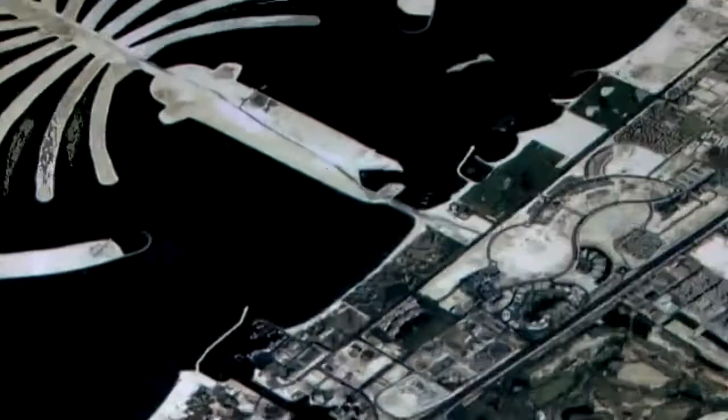Stretching 5.5 kilometers into the Arabian Gulf lies the most audacious engineering project the world has ever seen. Palm Jumeirah is so vast it can be seen from space. Built only from sand and rock, threatened by earthquakes, violent storms and erosion from the sea, it's remarkable that Palm Jumeirah exists at all. If God had wanted an island in the shape of a palm tree in the ocean, he'd have put one here. Engineers must race against time and battle constantly with the forces of nature. This is a megastructure they thought could never be built.

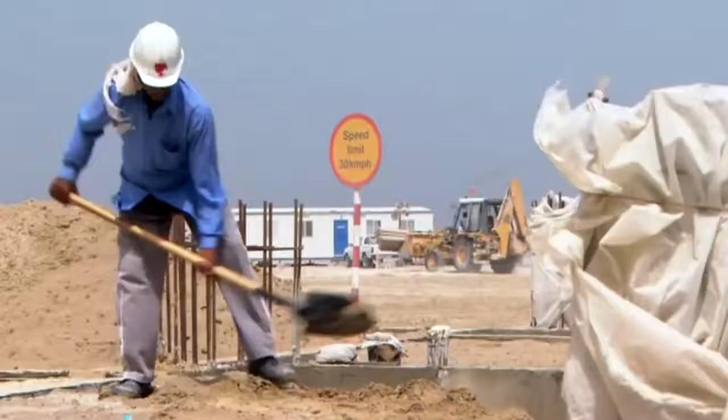August 2001. The Arabian Gulf is a massive hive of activity. Dubai is building one of the biggest man-made islands in the world. Engineers have a daunting task ahead of them, because this is a construction like no other.

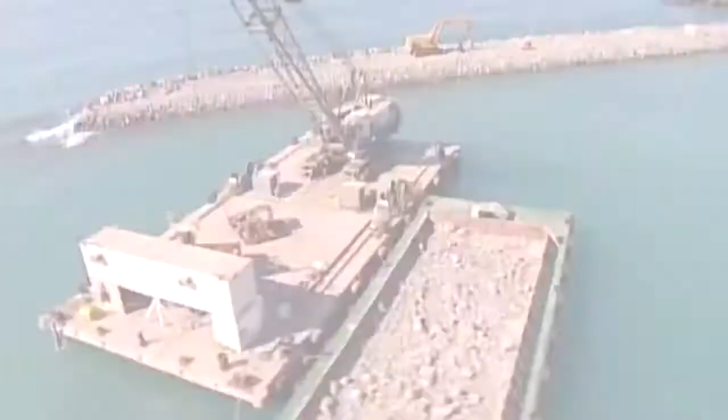All structures stand in defiance of nature. Most are built from concrete and steel, materials that are artificially strengthened. But this massive island is being constructed out at sea, using only natural materials, sand and rock. And both start eroding the moment they hit the water.

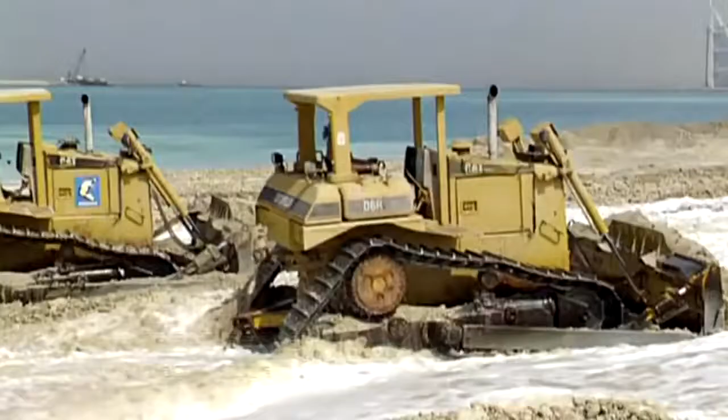For project manager Bob Berger, it's a daunting task. Any construction is in defiance to nature, and this is an extreme example of that. Every day, we're trying to prevent the destruction of what we built.

The Middle East, Dubai, the jewel of the Arab world. A kingdom built on the profits of its oil reserves. This tiny emirate, twice the size of London, is one of the richest places in the Arab world. But it hasn't always been like this.

50 years ago, Dubai was a trading town built on a creek. Over half a century later, it's been transformed. Now it's famous for gold, trade, and oil. But there's a problem on the horizon. By 2016, the oil will have run out. It'll mean disaster for the economy. Dubai must find a new source of income.

The Crown Prince, Sheikh Mohammed bin Rashid Al Maktoum, has a $2 billion plan to save his country. He's ordered his kingdom to transform itself into the world's number one luxury tourist destination. And the Crown Prince has a history of getting what he wants. To put Dubai on the map, he's already built one of the most luxurious hotels in the world, the Burj Al Arab, created top-class golf and race courses, and is planning the world's tallest building.

But now, the Crown Prince's big idea is mass tourism. Dubai seems the perfect spot. It offers sun almost every day of the year, glorious beaches and azure seas. 5 million tourists visit here annually. Now they want to triple this to 15 million.

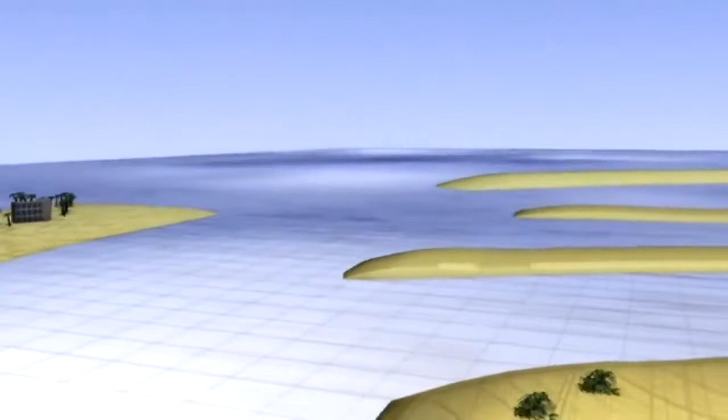The easiest way to build such a massive structure at sea is to use concrete and steel. But this doesn't fit with the Crown Prince's plans. His idea creates an added challenge: to blend in with its surroundings, the island must be made entirely from natural materials. The palm-shaped island will only be made from sand, 94 million cubic meters of it. All that protects this from the sea will be a breakwater, 5.5 million cubic meters of rock. Together, there's enough sand and rock to build a 2.5-meter high wall circling the entire world.

This may be the only place in the world where something like this could be done, to have the vision and then the courage to carry it through.

To make this audacious plan a reality, Dubai needs the best engineers on the planet. A worldwide search leads to Northern Europe and Holland. Experts in land reclamation, the Dutch have increased Holland's landmass by 35%. The Dutch team are immediately booked for the job.

The first thing they must prove is that it's possible to build an island out in the Arabian Gulf and that it'll stay there. They know the only way to keep the island in position is to surround it by a breakwater. But just how big does this sea defense need to be? To find out, researchers must calculate the strength of Dubai's storms, the height of the waves and tidal surges, and what effect global warming will have in raising the sea level.

The biggest fear for all coastal engineers are massive freak waves. These waves build up over long distances, pushed by persistent winds and large currents. They destroy nearly everything in their path.

But the island builders are lucky. The research team has worked out that the Arabian Gulf is the perfect place to build this megastructure. On average, the Gulf is only 30 meters deep, and it's only 160 kilometers wide. It's too short and too shallow for catastrophic waves to build up.

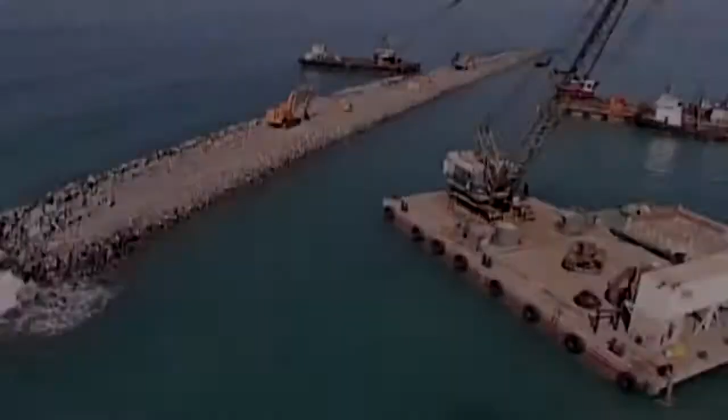September the 11th, 2001. The World Trade Center in New York is attacked in a brutal act of terrorism. Overnight, tourism to the Middle East stops. But work has already started on the Palm Island. Will millions of dollars and months of research all be in vain?

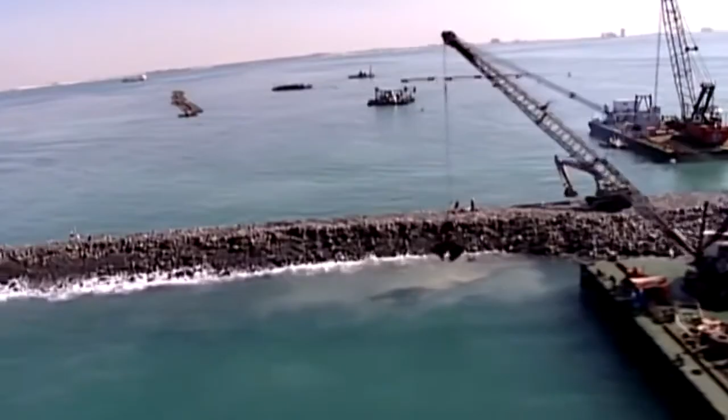September 2001. In the wake of terrorist attacks in the United States, travel abroad halts abruptly. Fear and panic spread. People are too frightened to travel, particularly to the Middle East. It could have disastrous consequences for Dubai's ambitious plans.

Work has already begun on building one of the biggest man-made structures in the world, a giant palm-shaped island that'll transform Dubai into a world-class holiday destination. The massive 11.5-kilometer breakwater is under construction. Both the breakwater team and the Palm Island team are assembled to make the dream a reality.

But 9/11 throws the plans into turmoil. The 1,200 foreign engineers fear their lives could be in danger. They make contingency plans to leave the country. In the meantime, they're advised not to go into Western hotels and bars.

Business slumps. Beaches are empty. Restaurants deserted. No one wants to be here. For 3 months, Dubai grinds to a halt. The sun is setting on the Middle East's tourist industry.

But the job must carry on, whatever the political climate. The oil reserves are running out. The Crown Prince stands firm. The developers are now committed to the build.

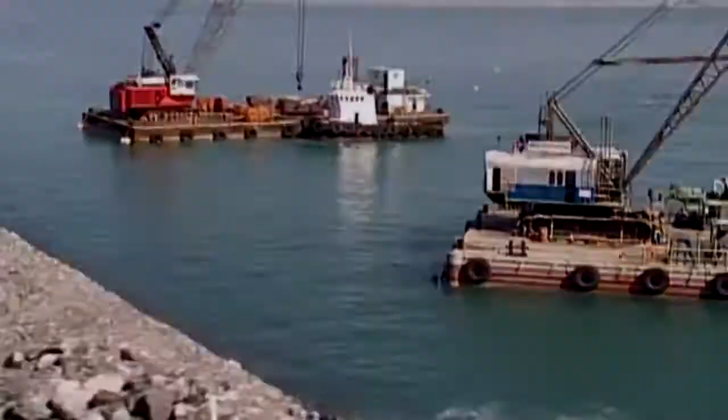Millions of dollars have been spent hiring the world's top reclamation engineers. They've worked on huge projects, like Hong Kong's Chek Lap Kok Airport, Holland's North Sea Wall, and Singapore's Industrial Centre. But no one has reclaimed a structure this size or shape before.

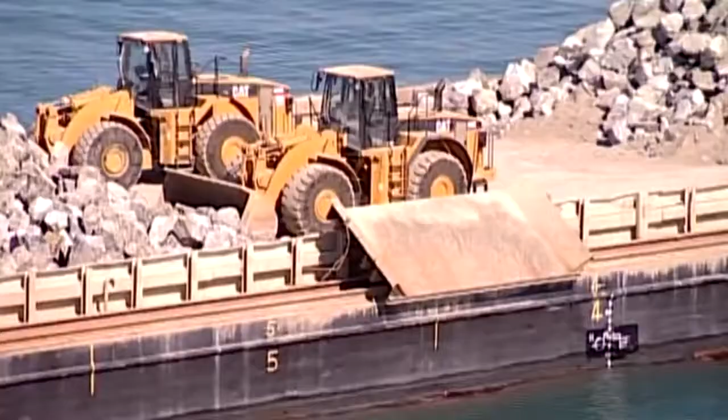By November 2001, the race to build this megastructure is really underway. 9 barges, 15 tugboats, 4 dredgers, 30 heavy land-based machines, and 10 floating cranes are needed to construct the massive seawall. For the breakwater team, their first step in this awesome challenge is to build up the sea floor.

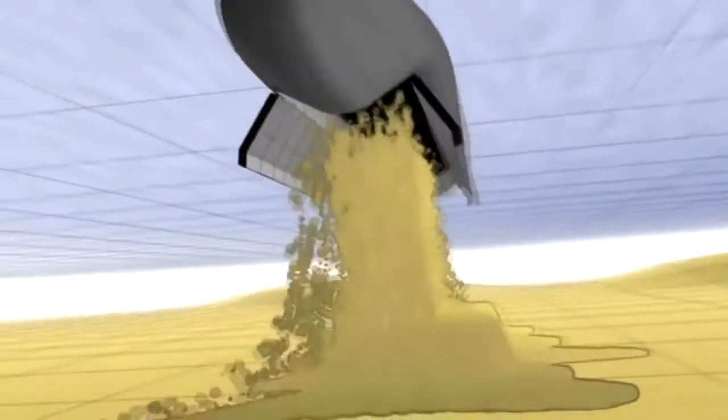3 massive dredgers take up a thin layer of sand from the barren seabed nearby. Then they dump this sand in a layer up to 7.4 meters thick. This must be done while the sea is at its calmest.

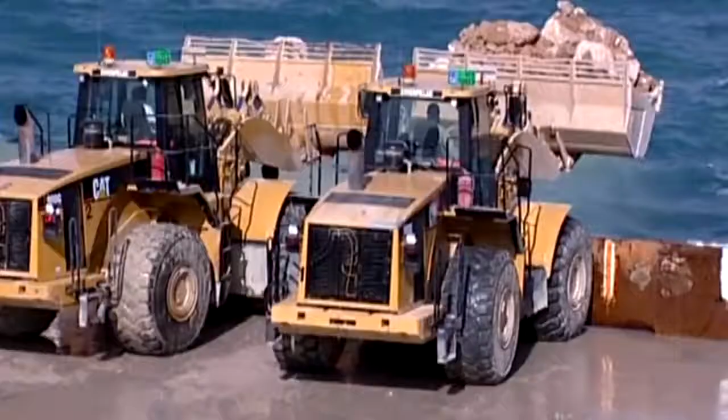To keep it in place, barge loads of rubble are dropped on top of this. This bed of rock will raise the breakwater from 4 meters below sea level to 3 meters above. It's the beginning of the sea defense, without which the island cannot exist.

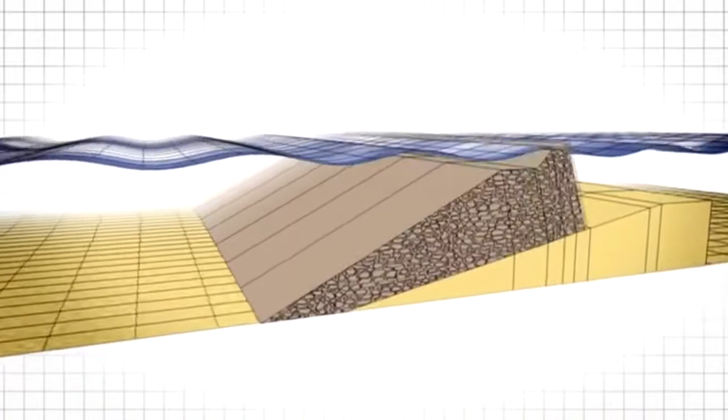The sloping layers take out the force of the waves as they hit the wall, but the sand and rubble layer is only the base, the core of the breakwater. What really creates the protection is the outer armor. For this, engineers need vast lumps of rock.

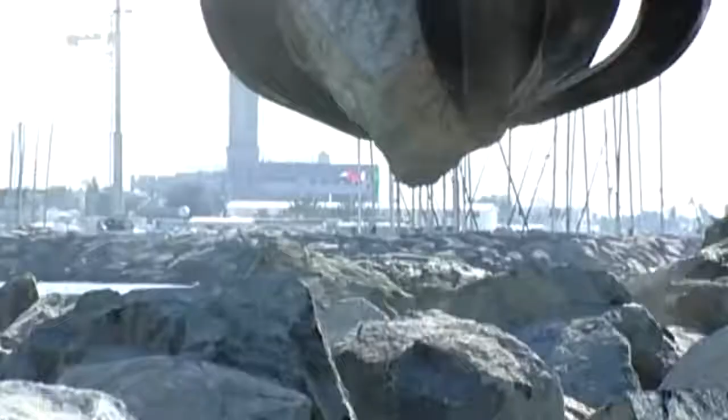Each piece of rock weighs up to 6 tons. It's these massive boulders that will protect the fragile island from the destructive force of the sea. But sourcing enough rock is an enormous task.

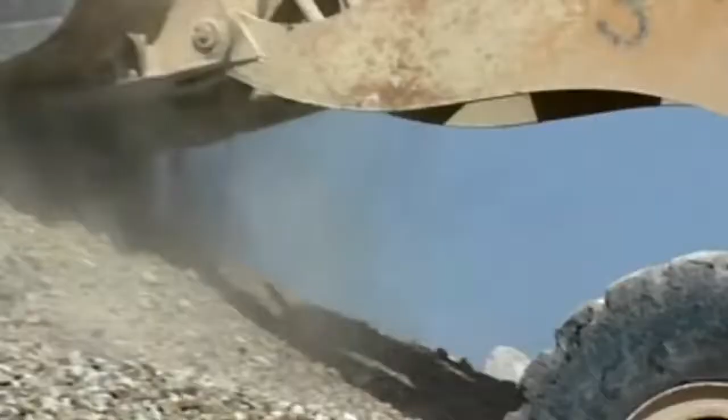Excavation teams spring into action in 16 quarries across the United Arab Emirates. The 11.5-kilometer breakwater needs a lot of rock, 5.5 million cubic meters of the stuff, enough to build 2 Egyptian pyramids.

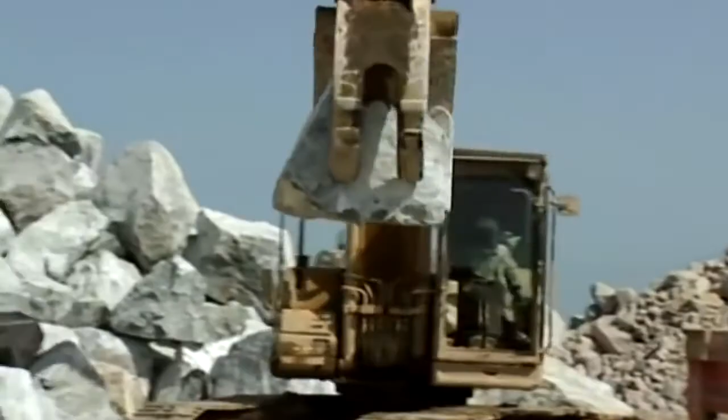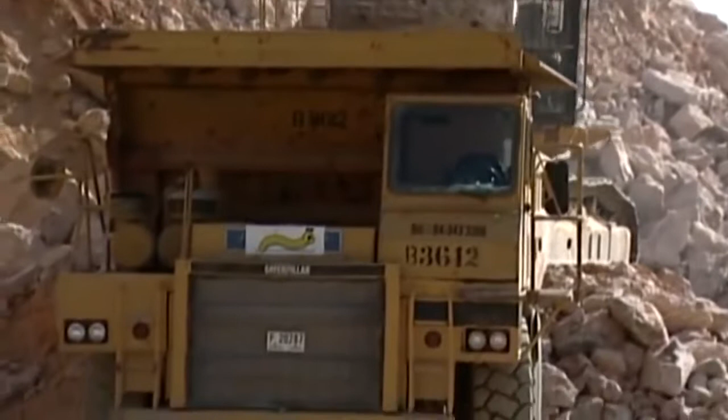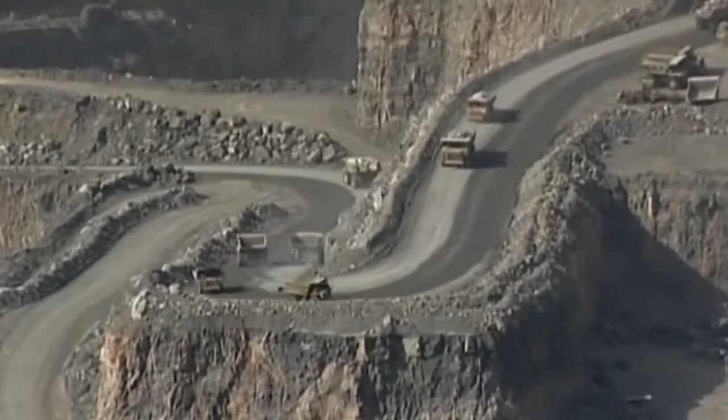Rock is blasted out of the mountains night and day. Loaded onto dozens of lorries, it begins the arduous journey to the coast. Here, the rocks are immediately piled onto barges and shipped straight to the construction site. It takes less than 24 hours for each rock to travel from quarry to breakwater.

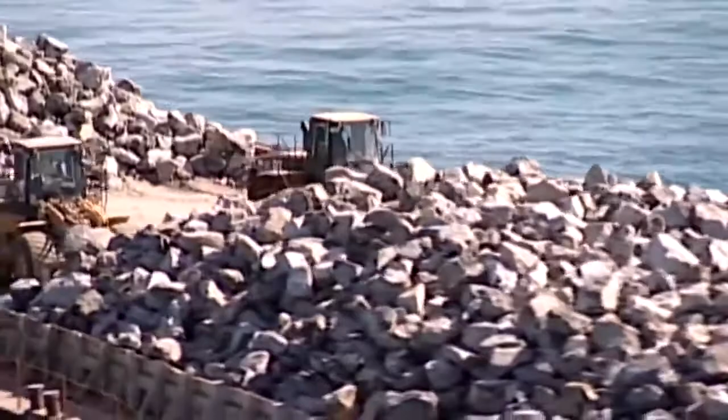24/7, this floating conveyor belt delivers up to 40,000 tons of rock per day, nearly the same weight as 2 aircraft carriers. The density, size, strength, and permeability of each boulder is crucial. This stone wall must last for centuries. There's no concrete or steel holding these rocks in place.

These vast boulders are not just dumped in position, graded by size and weight, it's the sheer volume that keeps them here. Positioned by cranes, each rock must interlock with the next to withstand the full force of the sea. Constant checks are needed to ensure the breakwater is in the right place and the rocks are stable.

The only sure way to do this is to send in divers to pinpoint and check every meter of it. Nothing about this megastructure is left to chance. Any movement could cause the rock to crack and the wall to disintegrate, leaving the whole project vulnerable.

A detailed study of the breakwater rocks below the water is needed. Divers are looking for signs of fatigue on these 6-ton boulders. Their fear is that some will have splintered or been knocked out of place by strong waves when they were put here.

Every 27 meters, a diver surfaces to record the location of the rocks they're checking. The reading is taken from a man based on land, but so far this section of the breakwater stands firm.

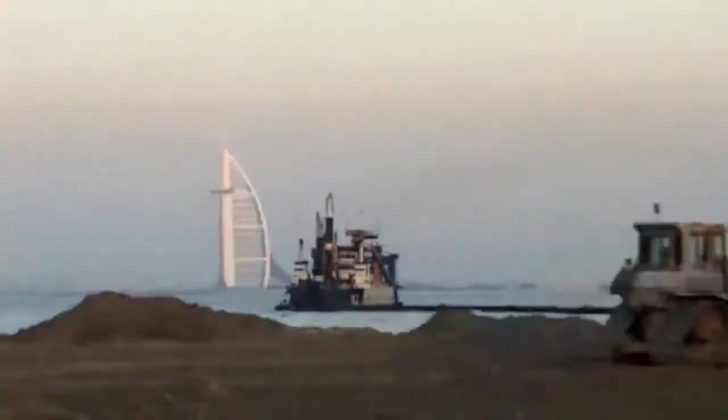It's a momentous achievement for the team, but there's still over 10 kilometers of this vast sea wall to build. The engineers are jubilant, but their happiness is short-lived.

Winter is closing in. With a schedule of only 2 years to complete the breakwater, the last thing anyone needs is a delay. Winter in the Middle East brings shamals, great storms with winds of up to 56 kilometers per hour. Wind shifts are sudden, whipping up the sea, bringing torrential rain, violent thunderstorms,

or blinding dust storms. On land, little can move. Out at sea, things are even worse. Massive waves batter the boats that need dead calm water to place the sand and rock with pinpoint accuracy.

We had to seek shelter in the very little shelter that we had built. Engineers planned for the bad weather, but the storms of March 2002 are worse than they feared. Everybody crowding around trying to protect themselves from the storms.

The boats find shelter, but more worryingly, will the breakwater hold? It's a nail-biting time. Over the next 3 weeks, the storms are relentless. All the engineers can do is watch and wait.

The breakwater stands firm, but the schedule is slipping. The construction team is 3 weeks behind, and the pressure is immense. Every second counts. It's vital that the fragile sand island has protection.

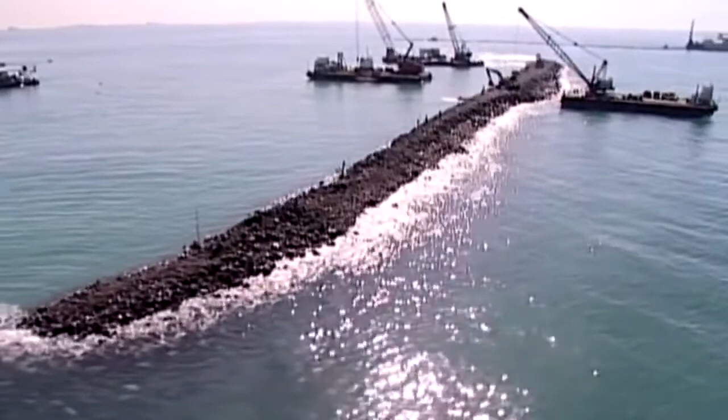Only when a 550-meter-long section of breakwater is built can the Palm Island begin to rise above the sea. But the schedule is desperately tight. The entire megastructure must be complete by 2006. They have 2.5 years to create the island and breakwater, and just 2 years to build the city on it.

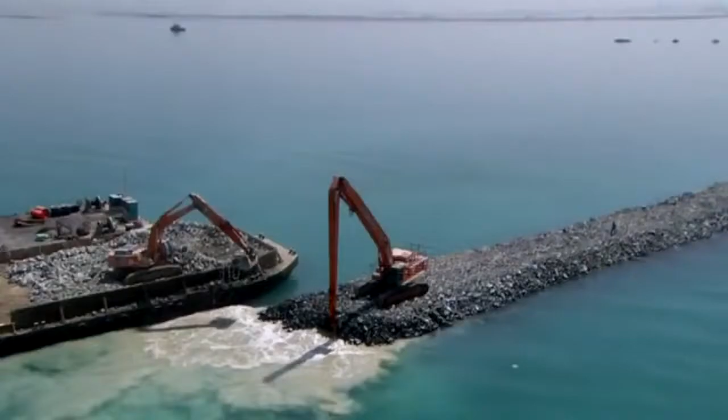The only way to meet the deadline is for both the breakwater and the island to be built at the same time. It's not an ideal situation. It will mean that throughout the build, the Palm Island will have the bare minimum of protection from the sea. But the engineers have no choice.

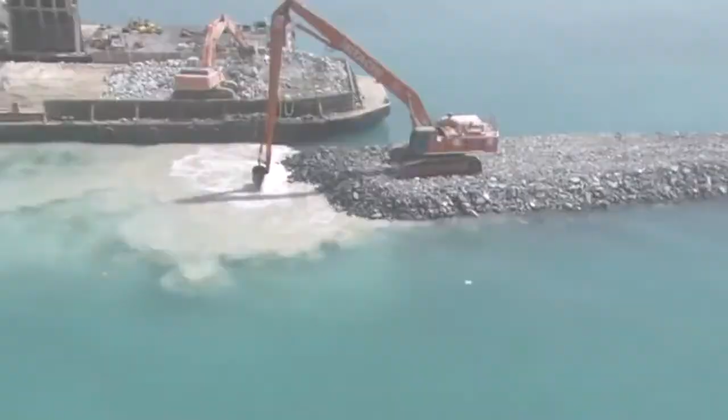The deadline is set. While the second team building the island wait for the protective breakwater to be built, they keep ahead of schedule by laying the sand foundations below sea level. But now, 8 months after construction began, they are desperate to break the surface.

Finally, April 2002, the first 550-meter section of the breakwater rises 3 meters above the sea. At last, the builders of the Palm can step up the action and bring the island above sea level for the first time. To complete this massive island, Team 2 has the awesome task of finding 94 million cubic meters of sand to create their island.

That's enough sand to cover the whole of Manhattan 1 meter deep. It's an enormous job in itself, but finding the right sand is an added headache. Dubai has more sand than it could ever need, but there's a problem. Desert sand is the wrong material for the job. It's too fine. The particles won't cling together. It means that the vast sand island would simply wash away. The engineers must look elsewhere.

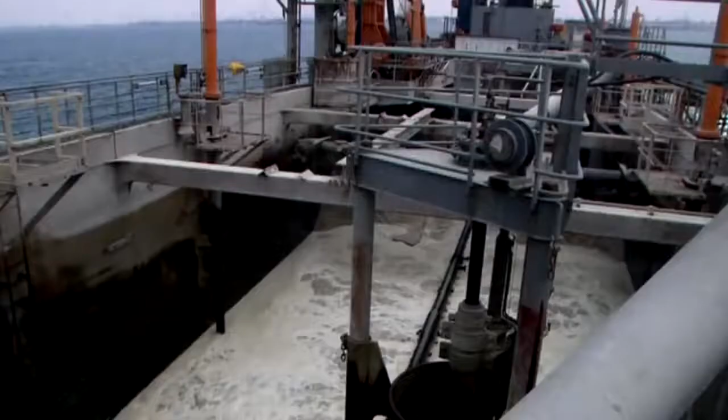The best sand for the job is found 6 nautical miles out at sea. This sand is much more suitable. It's coarse, packs densely, and is more resistant to wave impact. They will dredge sand from the Gulf seabed. And there is an added benefit: the dredgers will spend less time transporting the material to the construction site.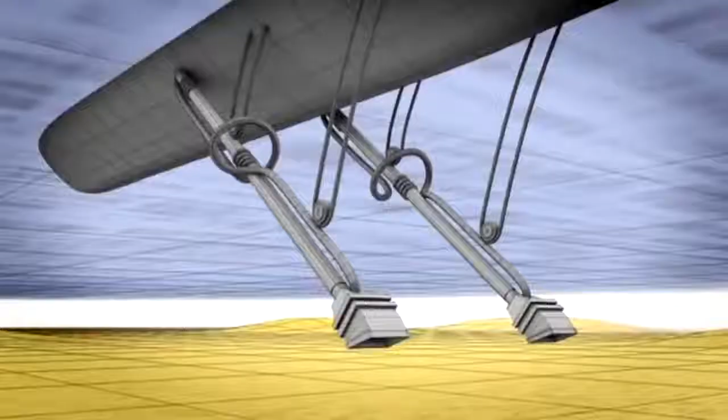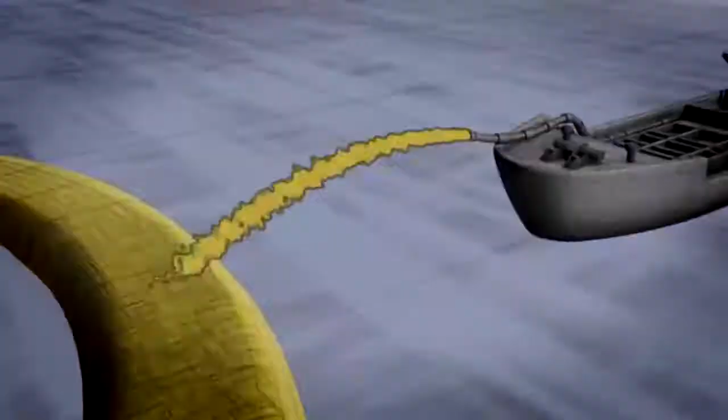In just 3 hours, a dredger travels to and from the site, scoops up the sand, and sprays it into position. It works a 5 square kilometer area, dredging up the top meter of the sea floor. It takes less than an hour to fill the 8,000-ton tank with sand. The sand is then pumped through a pipe and sprayed into place at 10 meters per second, enough to fill an Olympic swimming pool in 4 minutes. The process is called rainbowing.

The island construction team work round the clock to keep to the tight schedule. Night and day, the island grows bit by bit. The rainbowed sand builds into a sandbar, rising up to 4 meters out of the water. But for the engineers, there are mixed feelings. Is the shape of the island progressing as planned?

There's great excitement, and there was great anticipation, and a little bit of fear. Is it in the right place? With doubt cast over the construction, Dubai has a trick up its sleeve.

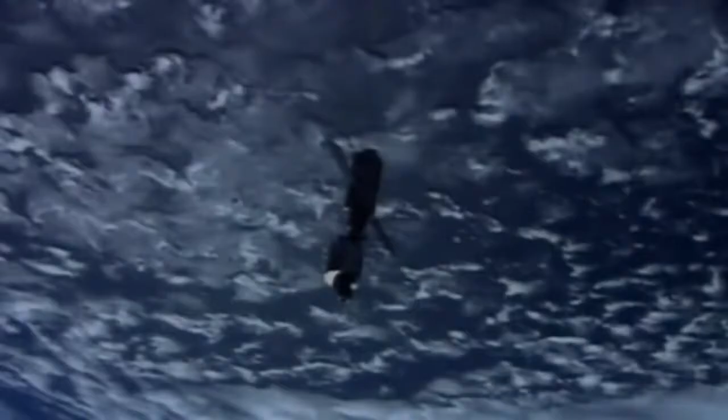676 kilometers up in space, Dubai has access to the only privately owned satellite in the world. It's so powerful, it rivals those of the Russian and US military. The satellite, IKONOS, orbits the Earth, taking pictures that prove the island is totally on track, so far. It also means the Crown Prince can keep a close eye on his pet project.

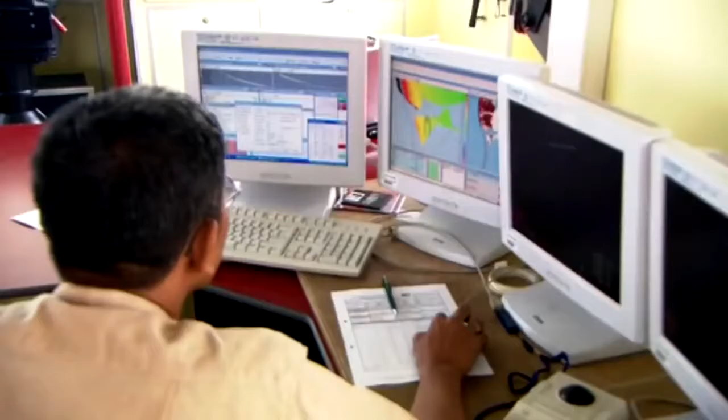August 2002, a year in, and the island team is ahead of schedule. 8 kilometers of the breakwater stands firm. 8 palm fronds break through the azure seas. But it's a grueling and difficult process.

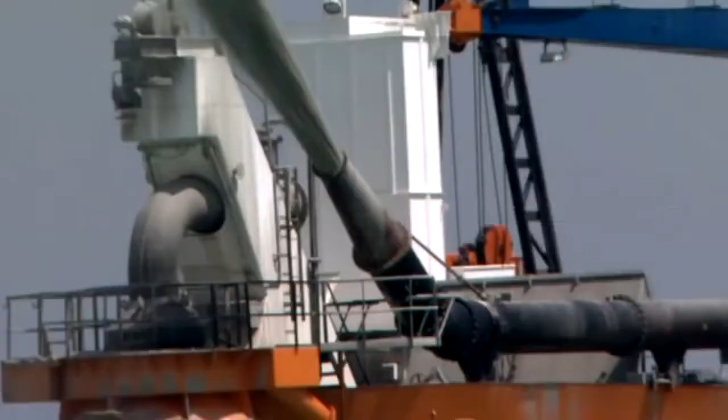Rainbowing is a common operation in land reclamation, but this is no ordinary reclamation project. There is no mold for the palm shape and no fixed points to get bearings from. The unique shape makes it a nightmare to build because the whole design relies on accuracy. This enormous structure has 56 kilometers of waterfront and almost all of it is curved. To make things more difficult, it's impossible to tell from the ground if the sand is falling in the right place.

The only way to complete this task is to use state-of-the-art technology. Prior to GPS, we couldn't have done this job. There are only 2 straight lines in this project; all the rest of them are curved. It's all down to a team of 5 men who walk the perimeter of the island every day as it takes shape. It's grueling work.

Summer temperatures reach a searing 48 degrees Celsius. Humidity hits 95%. With heavy packs strapped to their backs, these mobile receivers create a grid reference for the island. Receiving signals from space and a fixed position on land, the height and position of the sandbars is recorded. With these coordinates, dredgers can sail into the exact position and rainbow the sand with pinpoint accuracy.

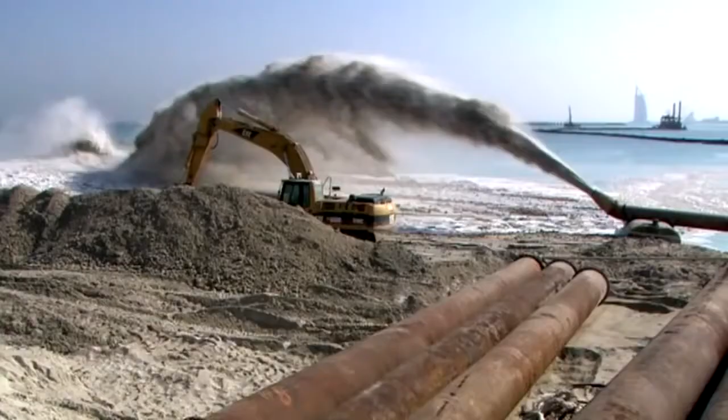Post 9/11, Dubai emerges as a safe haven in the Middle East. The beaches fill up again. Business resumes. The Crown Prince's gamble to continue construction has paid off. But there is still a deadline to meet: the island must be built by 2006.

Coordination between the two teams, one building the breakwater and the other reclaiming the sand island, is crucial. If they don't work in perfect synchronicity, the whole project could be thrown into jeopardy. If the breakwater progressed too quickly, it would cut off access for the reclamation contractor. If the reclamation went too quickly, it would be at risk from the storms. We couldn't let one get ahead of the other in any way. It's a delicate balance. But a year into the project, incredibly, work is on schedule.

Against all odds, the Palm Island rises above the waves, protected by the ever-increasing sea wall. It's a symbol of engineering achievement. But the engineers' biggest challenge is still to come: how to make the island safe to build on.

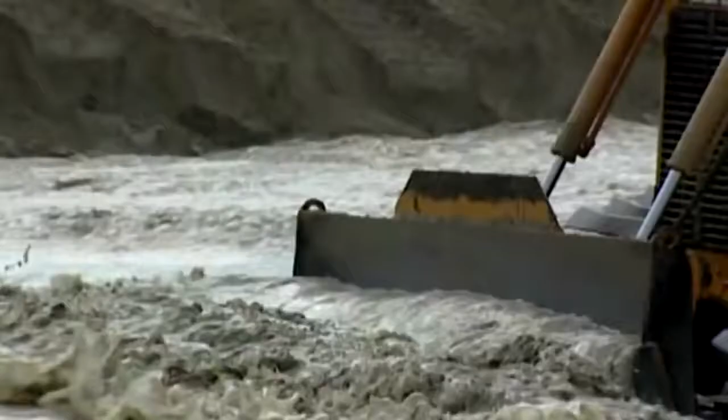The majestic Palm Island is only made from sand. But sand is unstable and highly susceptible to the movement of water around it. It also takes time to settle before it's strong enough to build on. This awesome structure will support a city of 120,000 people, and their safety relies on firm foundations. This massive sand island must be made rock solid. But how?

October 2002. Dubai is building the world's most audacious engineering project in the Arabian Gulf: a 5.5-kilometer island in the shape of a palm tree, made entirely out of natural materials.

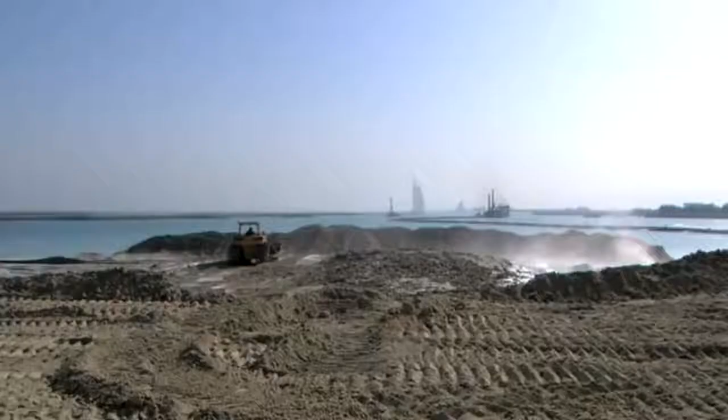A year into the build, and two-thirds of the breakwater is complete. Eight kilometers of massive rocks piled three meters above the waves, backed by 200 meters of beach that will eventually carry 22 hotels. Behind this sea defense, the first 9 palm fronds made of sand rise above the water. Dredgers spray sand from the seafloor, a process called rainbowing, to create the first half of the 5.5-kilometer island.

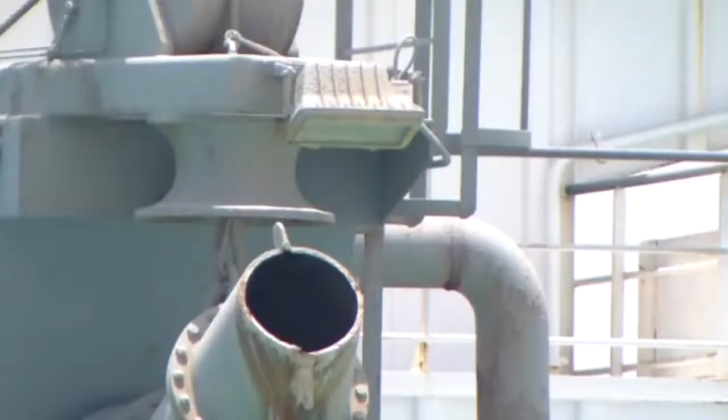But building a man-made structure in the middle of the sea with only rock and sand throws up challenges every step of the way. The team constantly battles with nature as the sea erodes the work they do. We worried initially whether we could actually do it, that we could place the sand where it should be, that we could place the rocks where they should be.

The teams now race to finish the project. But then the engineers discover a problem that could put the whole project in jeopardy. The decision to start construction before completing the research has finally caught up with them.

Coming in or going out, the sea is not circulating around this massive megastructure as they planned. The tides are not flushing the system properly. Clean water is not moving fast enough round the inner waterway. The water is in serious danger of becoming stagnant.

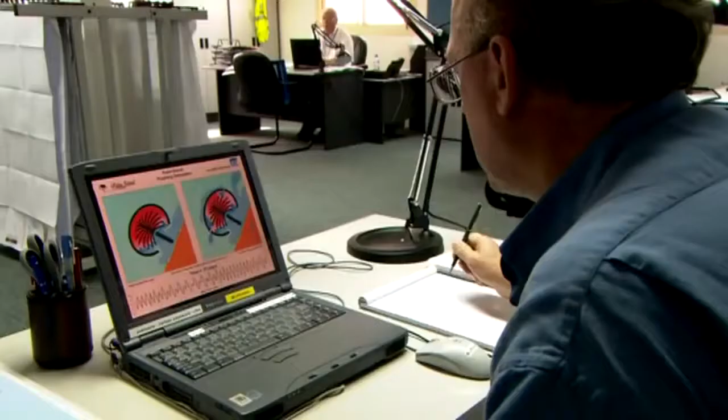People have paid millions for a piece of this paradise island. Green, fetid water is not going to work. A solution must be found, and fast. Changes must be made to the design. But all the time, the Palm Island is taking shape to the original plan.

Further tests are run on the computer. Luckily, the solution is found just in time, and it's simple: the seawall must have two breaks in it. Two 4-lane bridges link the sections of the breakwater. These two openings mean enough fresh-flowing water can get into the system.

Twice a day, the tide enters the structure, pushing clean water around the fronds. Over two weeks, the entire waterway is replenished. But there is always a fear it may return. Environmentalists now test the water every day to check that the system is working. The return of algae and stagnant water is something they can't allow. With the water quality assured, the project is back on track.

Teams race to finish the structure. Seven dredgers rainbow the sand, creating the last few palm fronds. Floating cranes lift the final rocks into place. By August 2003, the breakwater is complete. An awesome 5.5 million cubic meters of rock now holds back the full force of the sea.

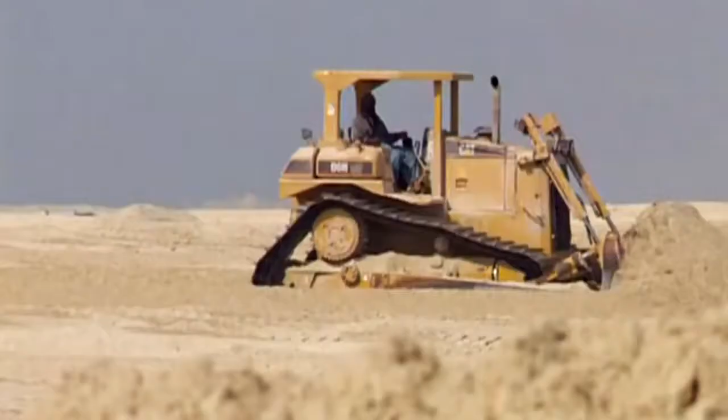Two months later, in October, the island reclamation is finished. 94 million cubic meters of sand have been pumped into the Arabian Gulf to create the perfect palm shape. In just over two years, the Palm Island has finally risen from the sea. The deadline has been met just on time, and phase 1 of this monumental engineering challenge has been accomplished.

But there is still a very long way to go. Phase 1 is only the completion of the foundations. Now to fulfill the Crown Prince's dream: 4,500 houses and apartments, hotels and shopping malls must be built along the waterfront. This sand island must support an entire city. But here lies the next major problem: sand is not easy to build on.

Because the sand has been sprayed into position, it's loose and uncompacted. The material for the islands is dredged from the seabed, which means all the fine materials are already cleansed from the sand. You can drive on it within a couple hours after you reclaim it. However, it's not satisfactory to build on.

But a strong base is vital to support this city at sea. Before construction can start, engineers must find a way to compact the sand to make it firm. In theory, the idea is simple. All we have to do is compress the top layer. When you press down, there's very little displacement except straight down, nothing to the side. That gives us a firm surface to build on.

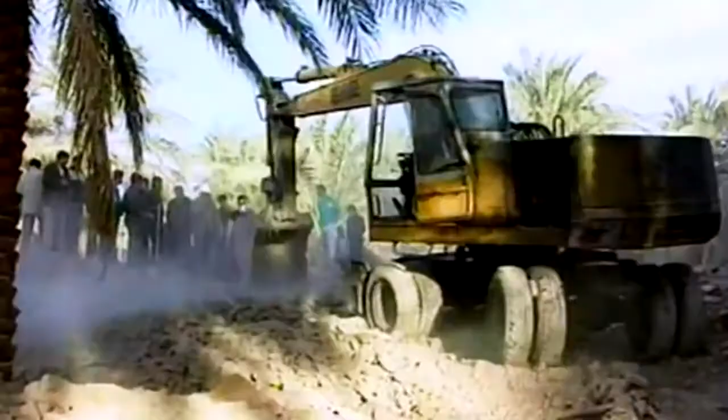Dubai sits just on the edge of a major earthquake zone. Bam, Iran, north of the Arabian Gulf, 5:26 a.m., 26th of December 2003. The town is hit by a quake measuring a massive 6.6 on the Richter scale. In minutes, 60% of the buildings are leveled. 43,000 are dead, 20,000 injured, and 60,000 are homeless.

Following this, multiple quakes hit Dubai, 480 kilometers across the Arabian Gulf. It's a wake-up call to the Palm Island project. If the epicenter hit Dubai, it could spell disaster. Should an earthquake come through the area, the sand might lose its cohesiveness down deep.

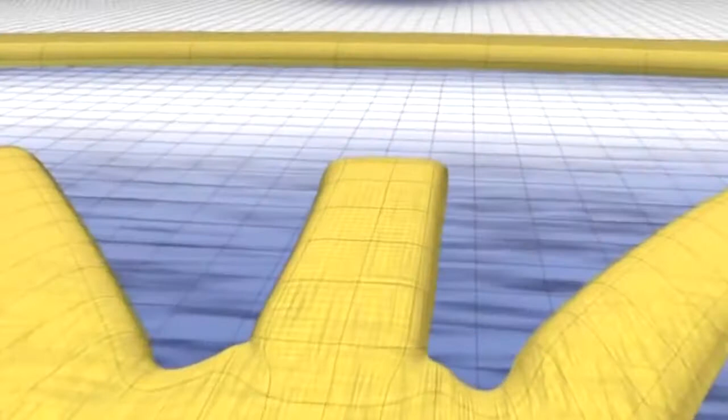The reclamation process piles sand one grain upon another. If we put the ocean around it, you see the island. However, the lateral forces of an earthquake can make the island disappear. This terrifying phenomenon is called liquefaction. It happens when a quake shakes the Earth's surface, causing sand particles to move. As the sand compacts, it pushes the water between the particles upwards, making the ground liquefy. It means the island would sink back into the sea.

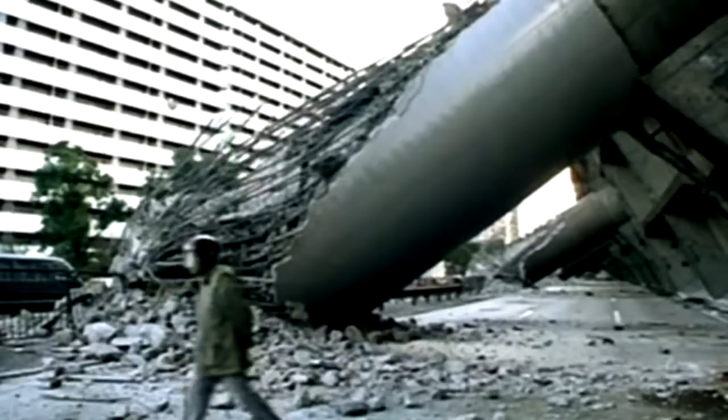This was terrifyingly evident in Kobe, Japan. In 1995, an earthquake measuring 7.2 on the Richter scale rocks the city. In seconds, the buildings are reduced to rubble. But in the harbor, events are very different. The force of the quake liquefies the reclaimed land the port is built on. Harbor buildings and walls literally sink into the sea, causing nearly $7 billion of damage.

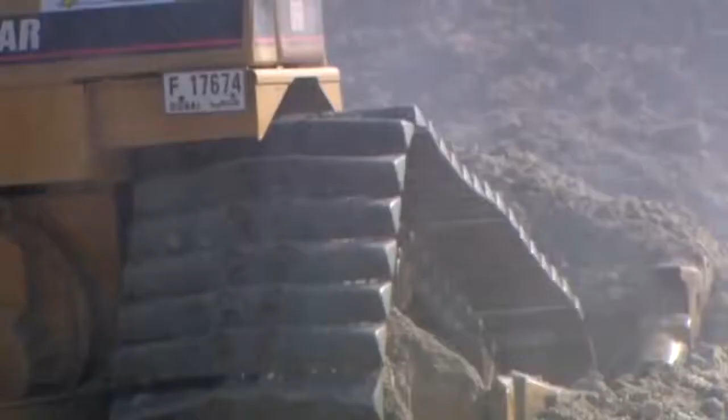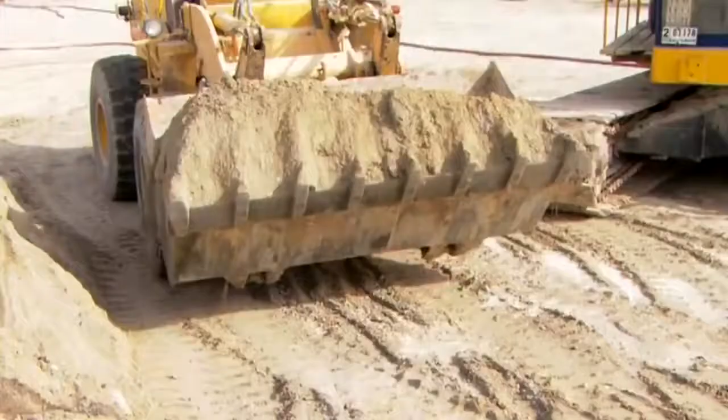It's something they can't risk in Dubai. Before any houses can be built, Palm Jumeirah must be made strong enough to prevent liquefaction. The team works out they need to compact a layer of sand 12 meters deep, too deep to compact by normal road roller. The only solution is a process called vibrocompaction.

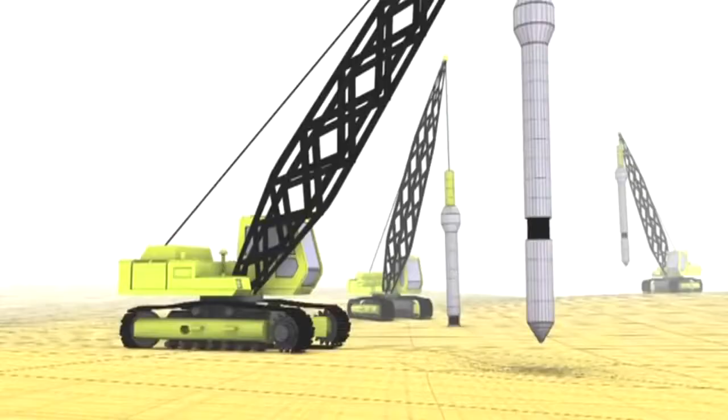January 2004, 15 machines work around the clock to firm up the land. Probes drill over 200,000 holes into the ground across the surface of the island. High-pressure water and air drives each probe deep into the earth. This shaft then vibrates, shaking the ground around it, and the earth is compacted. It's a tried and tested formula. As the sand compacts and sinks, more sand is poured in until the area around the probes is rock solid.

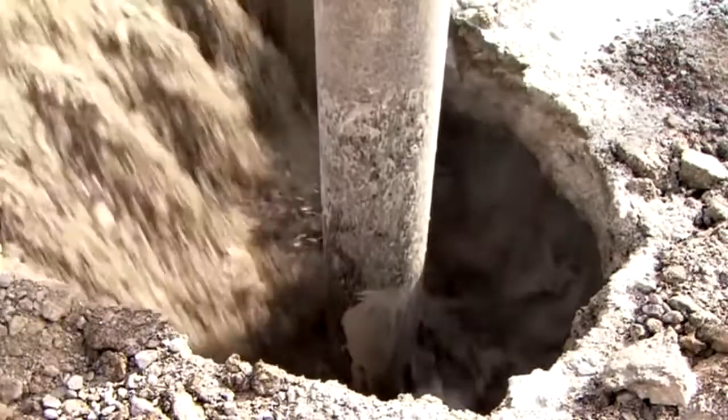It takes the team 8 months to stabilize the 16 palm fronds, but it has to be done to ensure the safety of 120,000 people who will live and work here.

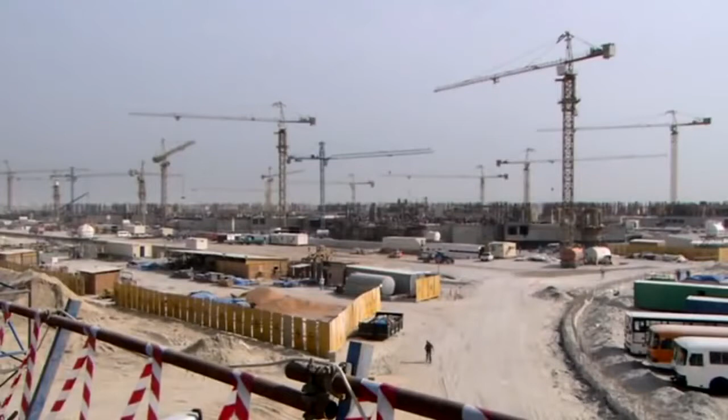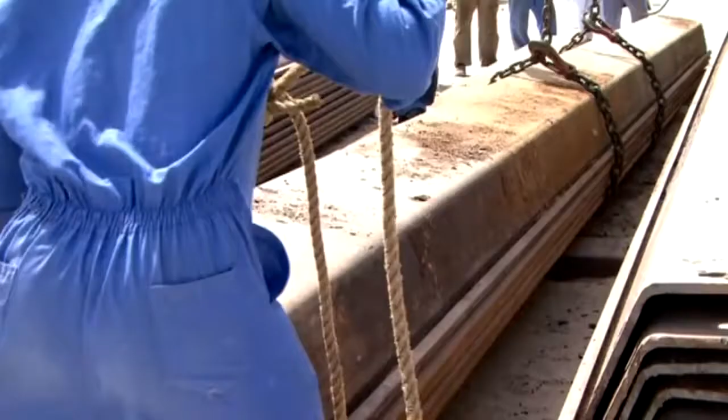March 2004, 2.5 years into the project, and Palm Jumeirah is ready to become a building site. Now thousands of trucks and cranes, tons of supplies, and 2,000 laborers descend on the island. This is the most complicated part of the project: the installation of the infrastructure, gas pipes, electricity cables, water supply, and buildings. In 2 years, they must build an entire city at sea. But have the developers set themselves a near impossible target?

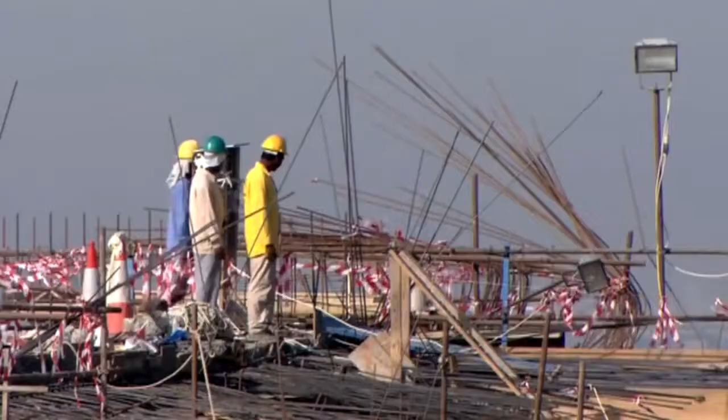January 2005. One of the world's biggest man-made structures has reached a critical stage. After 2 years, the island foundations rise out of the sea. Now engineers turn their attention from sand and rock to concrete, glass and steel. They're building an entire city out at sea in just 2 years. Nothing like this has ever been attempted before.

For project manager Scott Hutchinson, building the apartments is a massive logistical nightmare. I've probably worked on 3 or 4 other billion-dollar projects before, but this is without a doubt the biggest and the most complex that I've ever seen. And I can't imagine other projects being any more complex than this.

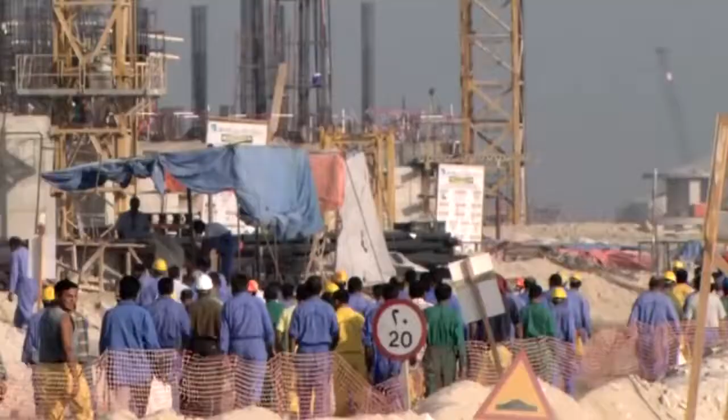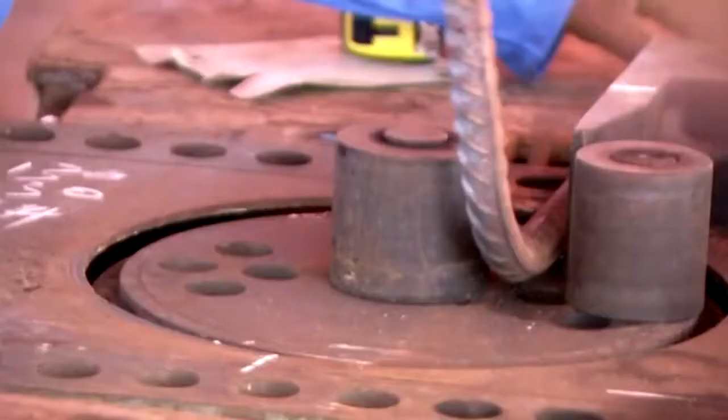850 buses ferry the 40,000-strong Asian workforce on and off the island in two 12-hour shifts. They'll work in grueling temperatures of up to 48 degrees Celsius. As well as thousands of people, millions of tons of concrete and steel are shipped in from around the world and driven onto the Palm.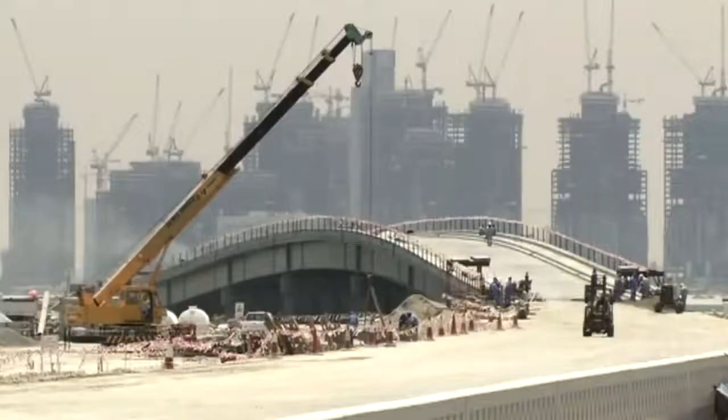51 different contractors build houses, roads, canals, shopping centres, sewage plants, and each part of the jigsaw must meet the next perfectly. To stay on schedule, all the materials must arrive on site exactly on time, and they will go to any lengths if they don't.

If material isn't showing up from overseas, you put somebody on a plane and fly the guy out there to get it done. You don't wait, you don't react, you just get out there and try to be proactive, because otherwise a job this size never gets done.

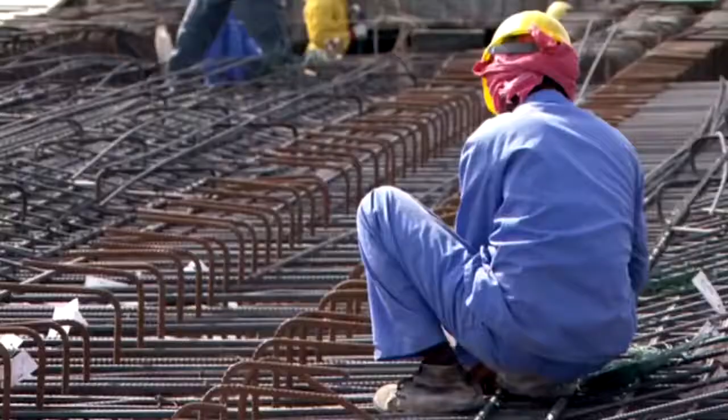Supply is not the only problem. Installation of the utilities and pipelines is a massive headache. Miles and miles of gas and water pipelines need to be laid across many different parts of the construction site.

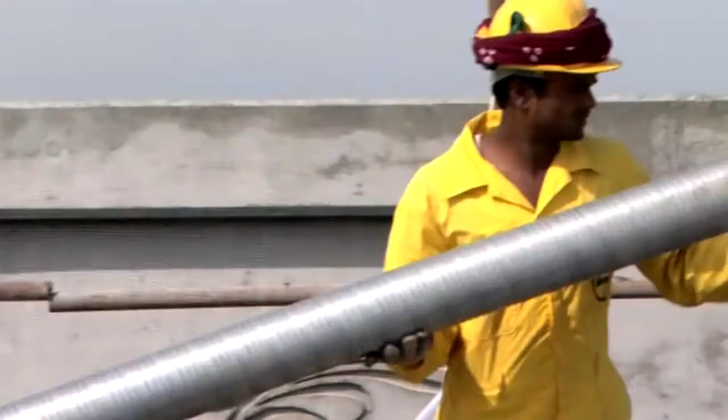Munir Haidar, head of the technical team, knows that on a job this size, a good plan is vital. It's not that there is no plan, there is a plan, but you have to monitor and adjust this plan on a daily basis because it changes every day.

Since the island's launch in 2001, it's changed beyond recognition. Originally, Palm Jumeirah was designed to house and service 60,000 people. But by 2004, developers realized the public loved the idea so much, they doubled the capacity. Everybody's changing their requirements, and you have to learn to react very quickly to that.

And in Dubai, things move quickly. The pressure is on. Incredibly, when the Palm was first released to the public, all the houses sold in 3 days. The most expensive go for $1.2 million. David Beckham and the England football team are amongst the owners.

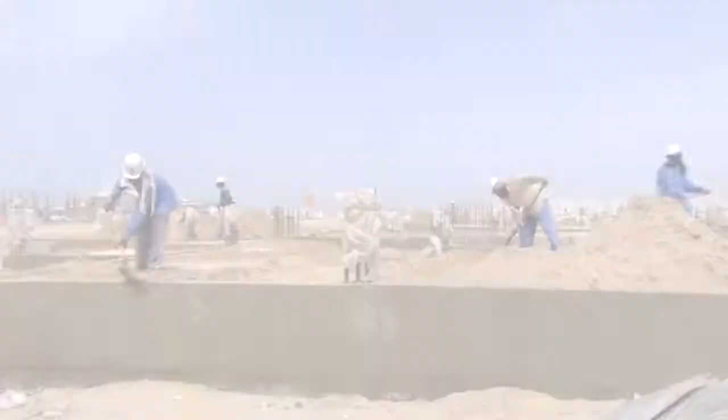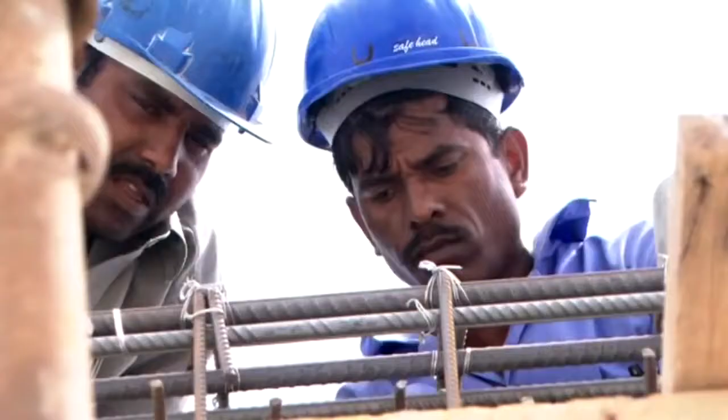Now, 3 years on, the residents want to move in. There are over 1,800 villas to build on the palm fronds, enough to stretch the Champs-Élysées in Paris 14 times. The delivery date looms nearer, and many of the houses are still at ground level.

The schedule is slipping, but the Crown Prince has promised the world a luxury location by 2006. The deadline must be met. To add to the pressure, the design of the palm trunk gets more elaborate every year.

This 1.6-kilometer stretch will carry at least 8,000 villa and apartment complexes, 220 shopping malls and restaurants, and the developers are still threatening more. A new plan is the 36-story Palm Tower, more space for shops, restaurants, and 450 deluxe apartments. But all this extra development comes at a price. The deadline for the trunk has slipped to 2008.

Well, I guess one of the best parts about it is that when you get frustrated with all the challenges and the paperwork and the meetings and everything that goes with building a project like this, you come outside, you see the sunset, you see the sea, and you really realize not only is it an amazing project, but it's an amazing setting. But this awesome setting creates hidden problems for the engineers.

With Phase 1 complete, the island reclaimed, the Palm now faces its biggest enemy, the environment. Nature will permanently try to destroy anything built in its way. The bigger the megastructure, the bigger the problem. From the start of construction, there has been one issue engineers know they will face: the problem of erosion.

All beaches are constantly affected by waves, but with a man-made island, the problem is exaggerated. These beaches are not naturally replenished with sand by the sea. If nature won't do it, someone has to. Otherwise, the whole island will be washed away.

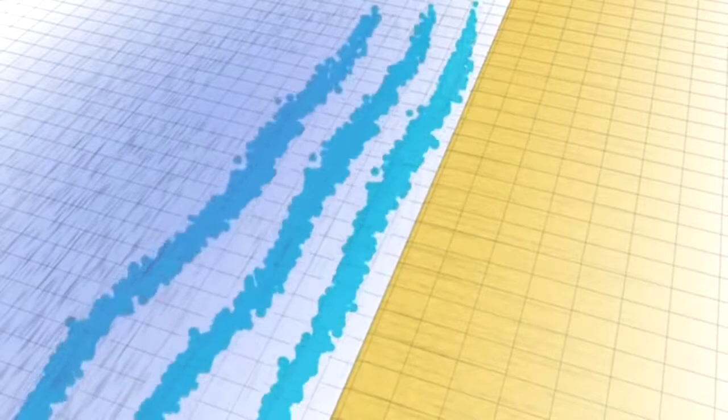Normally, the currents evenly push the sand along the coastline, keeping the beach straight. By building a massive structure so close to the shoreline, wave movement in the area has altered. The current is changing the shape of the coastline. In some places, sand is deposited, extending the beaches out to sea. In others, the beach is eroded away.

And initial research shows some worrying facts. In some places, the shoreline could be eroded by 5 to 10 meters per year. Eventually, it could destroy mainland resorts, property, and roads.

In time, the coastline will settle down. Nature and the structure will learn to live with each other. But this may take years. In the meantime, the developers have bought a dredger.

This will suck up the sand where it is built up along the coast and deposit it in the areas suffering from erosion, returning the coastline to its original shape. Dubai's beaches are safe, for now.

The engineers are constantly working out how to tame nature's forces. The erosion problem is under control. But the threat to the project doesn't just come from the surface of the sea. They now face a new dilemma beneath the waves. How has this awesome megastructure impacted on the ecology of the area?

August 2005, four years after the Palm project started, this audacious island stamps its mark on Dubai's coastline. This was the first step, a big step, in putting Dubai on the map. But by pushing into unknown territory, building structures never built before, engineers face new problems all the time.

Since the Palm Island's conception, environmentalists have been convinced the building of this megastructure would destroy local marine life, ruining one of its greatest selling points, the azure seas it sits in.

For the developers, it's a problem they're constantly watching. Every six weeks, divers check the waters. Fish and corals are monitored and measured. But fears that construction may have destroyed this underwater world appear unfounded so far.

In fact, this megastructure seems to be having the opposite effect. Not only is the marine life unaffected by dredgers removing a meter-thick layer of sand, but the breakwater has created shelter for fish and is attracting new species into the area.

Now the Palm developers are turning this to their advantage. They plan to build the largest artificial reef in the world. In June 2004, two jet fighter planes were dropped to the seafloor for people to dive on. There are even plans to sink a red London double-decker bus.

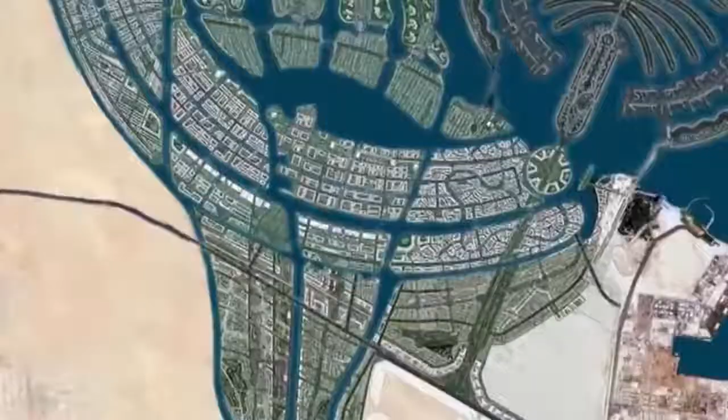In true Dubai style, they'll create something from nothing to rival the reefs of Australia, the Red Sea, and the Maldives. Even before the Palm is finished, the Crown Prince is inspired by its success. Now he wants two more islands, each bigger than the last.

Palm Jebel Ali is one year into construction. It's twice the size of the first, nearly eight kilometers in diameter. This is designed to be a tranquil island with 29 luxury hotels and an inner ring of water homes that spell out an Arabic poem scribed by the Crown Prince himself.

Even bigger is Palm Deira. Work has just started on this whopping 14-kilometer-long island that will support 500,000 people. Although engineers have the confidence of knowing how to build these structures, they now have a more worrying problem: supply.

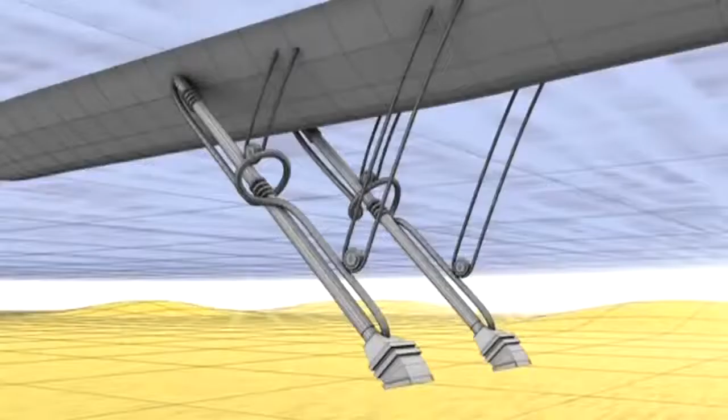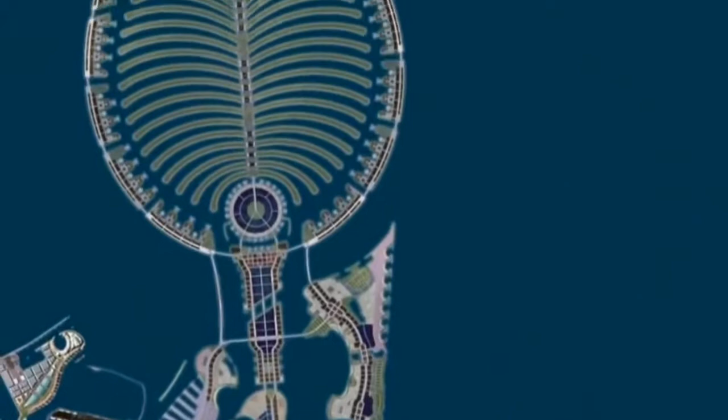To raise this island from the sea will take 1,500 million cubic meters of sand, 15 times the amount needed to build the first Palm. Could this outrageous structure fall at the first hurdle because of lack of materials? Dredgers are driven further out to sea in search of enough suitable sand. But the engineers are confident that their goals are achievable.

But just when they thought resources were stretched to the limit, the Crown Prince has the most outrageous idea of them all. To make Dubai the number one tourist destination, he wants to build the World.

Four kilometers out at sea, hundreds of small islands are being constructed. Seen from the air, these islands will take the shape of the continents of the world. It's an even more complicated structure to build than the Palm. This is not one island, but 300, and each one is different, varying in size from five acres to 20. The deadline for these exclusive private islands is 2007.

Arizona, Wyoming, France and Australia are all up for sale. They cost anything from $6 to $36 million, and that's before anything is built on them.

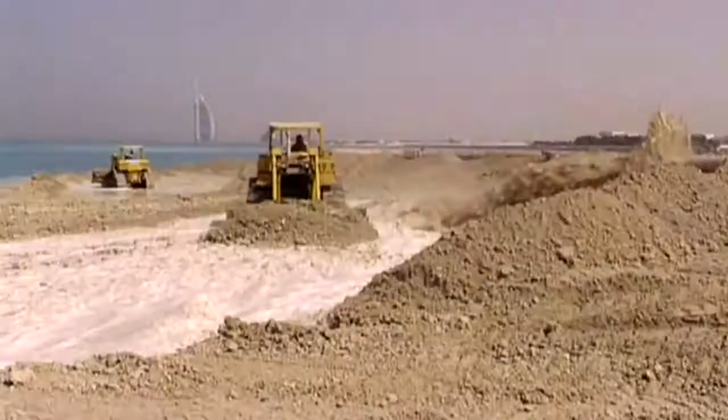But creating the World takes land reclamation to the limit. This archipelago of sandbars covers an area almost 7 kilometers by 9. Each island has to be built in exactly the right position to create the global look from space. Any mistake and the whole design will be ruined.

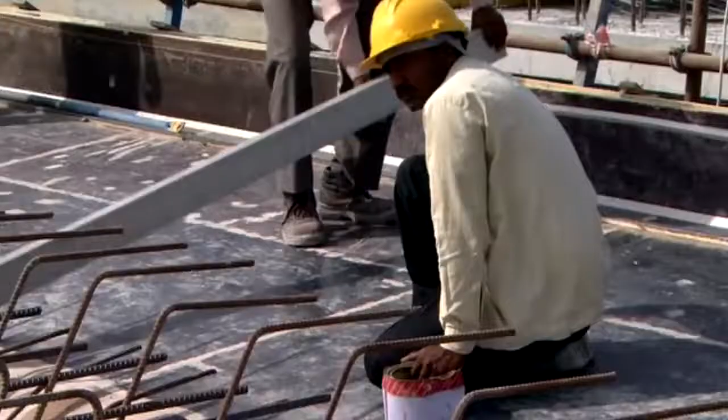The Palm Island put Dubai on the map. Now the World puts the map on Dubai. But have the developers gone too far? Will the demand for property keep up with the escalating build? Will the bubble burst? So far, two of the Palm Islands are completely sold out.

A third of the World has been snapped up. But this still leaves a lot up for sale. But the developers are confident, they see no end to the demand.

Megastructures are the latest craze. To top all plans, in January 2005, they launched the Dubai Waterfront. This claw-shaped landmass won't just stretch far out to sea, it will also create 75 kilometers of waterfront, stretching into the desert.